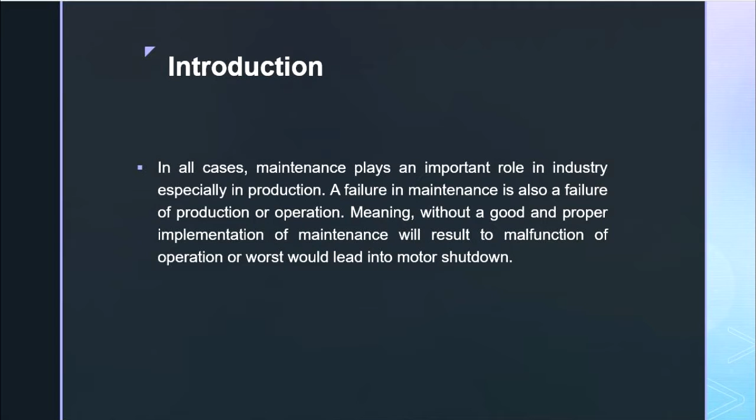Going on for introduction, in all cases, maintenance plays an important role in industry, especially in production. A failure in maintenance is also a failure of production or operation, meaning without a good and proper implementation of maintenance will result to a malfunction of operation or worst would lead into a motor shutdown. In modern plant operations, unscheduled stoppages of production or long repair shutdowns are intolerable. The high cost of the resultant downtime cuts deeply into profits. Among the 4 M's of production, which are the machine, method, manpower, and material, the highest contributing factor to downtime of the company is the machine.

Now, the company started its operation in 1999. Since then, the motors are repaired only if failure occurs. One of the major reasons is that it is too costly. As much as possible, the company wants lower expenses, thus they minimize their operation and maintenance cost. Considering the problems that we mentioned, the researchers decided to conduct an evaluation of the existing equipment at Kalaw Agro-Industrial Corporation, or KAIC Feed Mill.

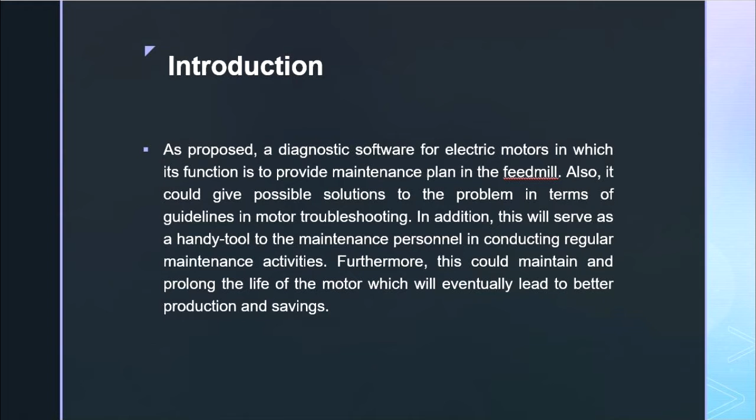The researchers proposed a diagnostic software for electric motors, in which its function is to provide a maintenance plan for the feed mill. Also, it could give possible solutions to the problems in terms of guidelines for motor troubleshooting. In addition to this, it will serve as a handy tool to the maintenance personnel conducting regular maintenance activities. Furthermore, this could maintain and prolong the life of the motors, which will eventually lead to better production and savings. Now, let's proceed to our objectives for our study.

First, the researcher will have to evaluate the profile of the electric motors in Kalaw Agro-Industrial Corporation feed mill in terms of its types of motors, specification of motors, date of its purchase, date of installation, and date of operation.

Second, the researcher will have to develop a diagnostic system software considering the following design: first is software design, which includes the database design as well as the algorithm. Next are those standards in compliance with organizations such as the IEC or International Electrotechnical Commission, the Philippine Electrical Code or PEC, and the National Electrical Manufacturers Association or NEMA.

Also, the researcher includes those factors that affect the condition of the motor. This includes the electrical factors, mechanical factors, as well as the environmental factors. And of course, for the effective maintenance program for the motors, the researcher provided a corrective maintenance such as motor troubleshooting, and for scheduled maintenance, which includes preventive maintenance and predictive maintenance.

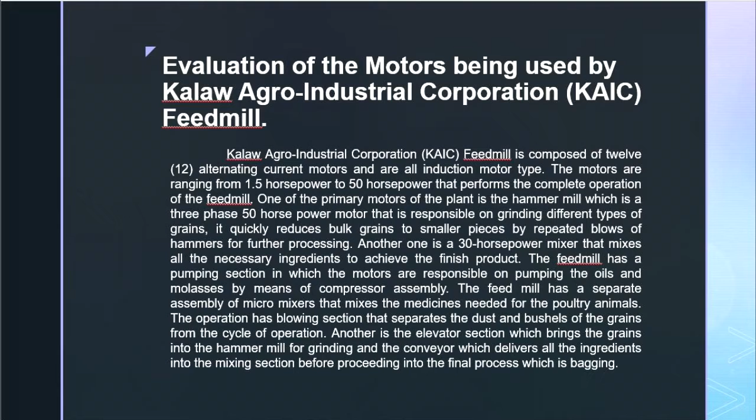The operation has a blowing section that separates dust and husks of the grains from the cycle of operation. Another is the elevator section, which brings the grains into the hammer mill for grinding, and the conveyor, which delivers all the ingredients into the mixing section before proceeding into the final process, which is bagging.

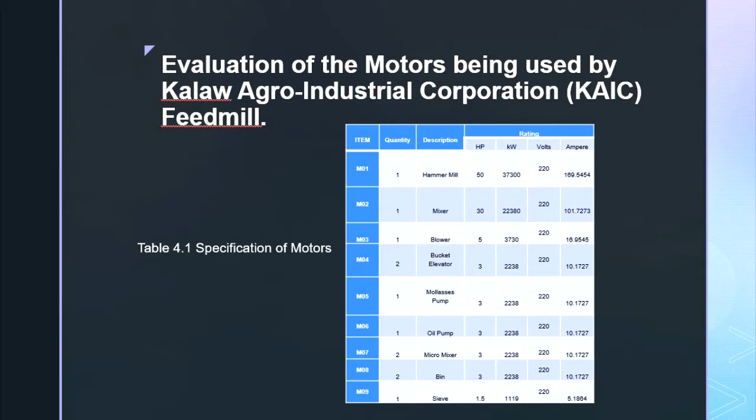The motors present in the feed mill are as follows: first is the hammer mill at 50 horsepower, next is the mixer at 30 horsepower, the blower at 5 horsepower, the bucket elevator, molasses pump, oil pump, micromixer, and bin at 3 horsepower, and the sieve at 1.5 horsepower. The ratings of each motor, such as its voltage and ampere, are used in the system for profiling purposes.

4.2 is about the software design and development. The designing and development of the diagnostic software for electric motors, considering its system requirements, shall be discussed in this section. For software requirements, first is the flowcharts.

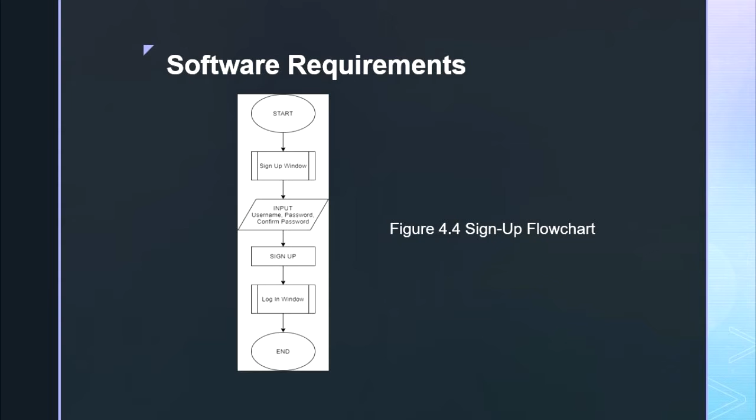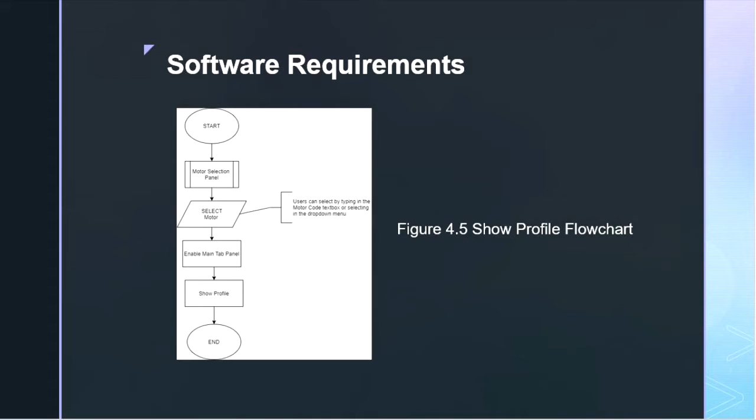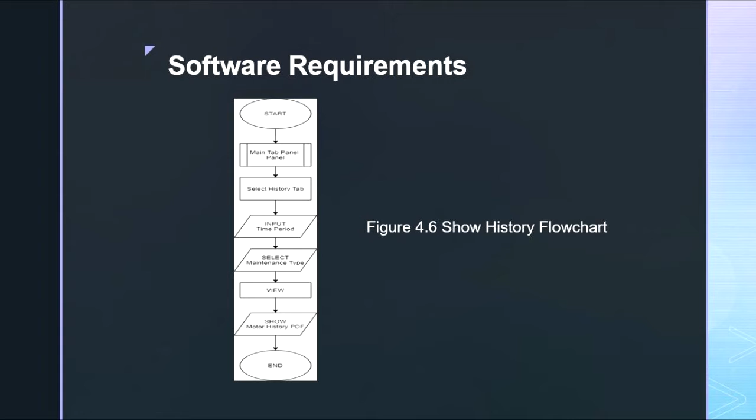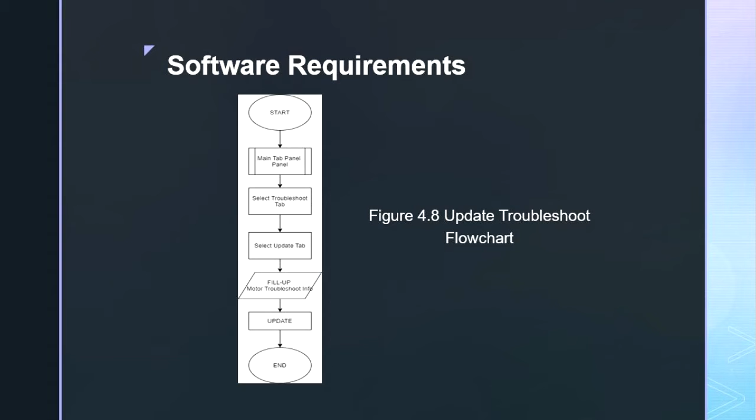Figure 4.10 is the Add Motor flowchart. Adding a motor is located on the motor selection panel. There is an Add Motor button where the user can click to register a motor. A motor registration window will be displayed where the user needs to fill up all the information about the motor. Once the information is complete, the user can add the motor by clicking the Add button.

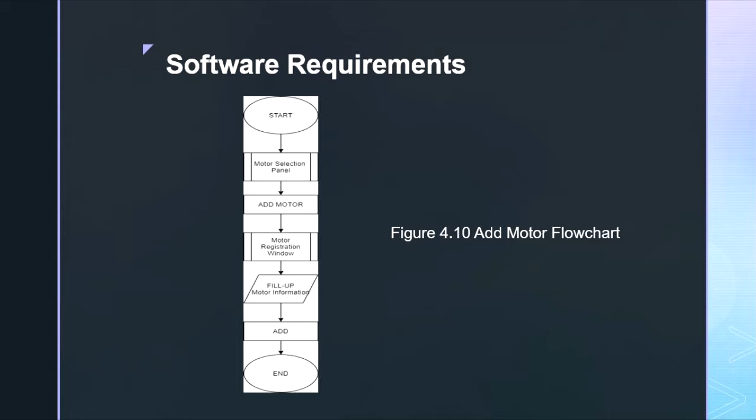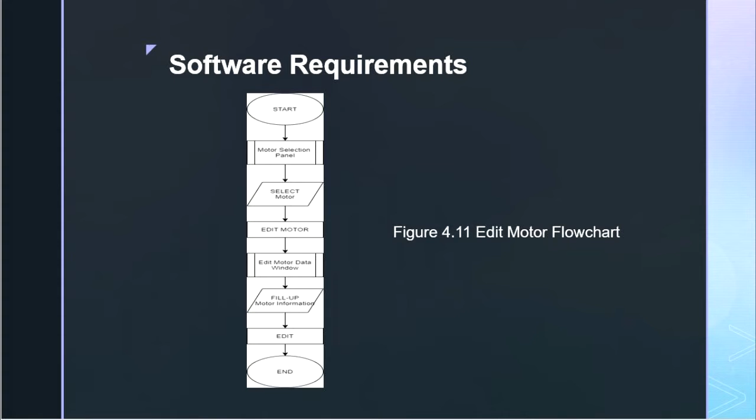Figure 4.11 is the Edit Motor flowchart. Editing the motor's information is also located on the motor selection panel. The user will select the motor to be edited, and the Edit button will be enabled. Clicking this button, an Edit Motor data window will display where the user can alter the information of the motor. After editing, the Edit button can be clicked to update into the system.

Figure 4.12 is the Delete Motor flowchart. In deleting a motor, the user will select a motor from the motor selection panel where the desired motor to be deleted will be chosen. After the motor has been selected, the user can access the Delete button, which when clicked will show a confirmation message asking if the user really wants to delete the motor. If yes, all the motor's information would be deleted.

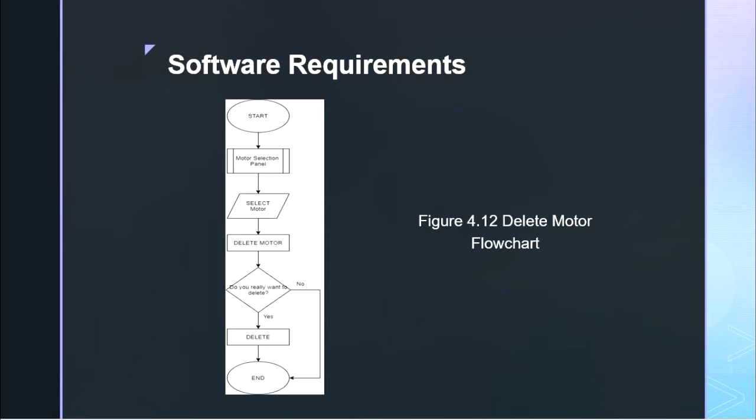Next is the programming language. The proponents used Visual Basic since this programming language has basic functions and commands that let the proponents simply drag and drop the objects and define its behavior and appearance.

Furthermore, there are methods that the proponents followed to establish a working system. First is the preparation of data: the manuals needed for the maintenance were gathered from other related studies and internet sources. Second is the software development: the software has different forms which were distributed within the proponents. The forms include the registration, profile, history, scheduled maintenance, the preventive and predictive, and the troubleshoot.

Third is the integration of data: the developed forms were integrated to establish a working system software. Lastly is the testing and simulation: the proponents underwent several testing and simulation of the software to identify the troubles and to finalize the functionality of the system. Next is the GUI, or Graphical User Interface design. The proponents designed the software as a user-friendly system.

The placement of the data was located where the user will have easy access, and the idea was comprised to minimize the space needed for a certain data.

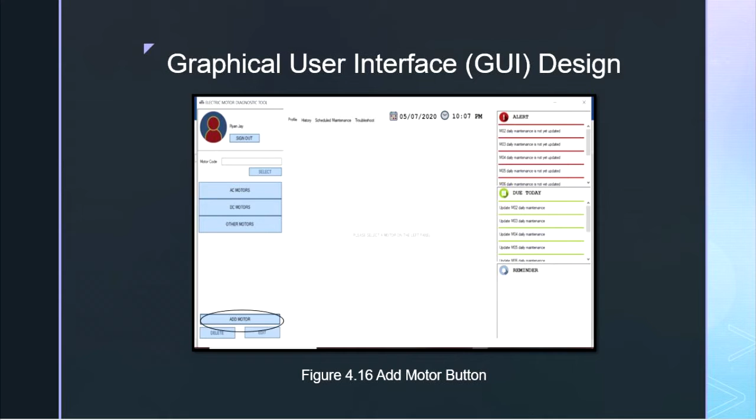Figure 4.16 shows the Add Motor button. Once the user was logged in, the system will allow you to select a motor if there is an existing one. But if there is not, you can add a motor into the system by clicking the Add Motor button on the lower left part of the window.

Figure 4.17 is the motor registration window. In the motor registration window, the user can now register a motor that was present in the company. The basic information like motor type, motor name, motor code, manufacturer, model, date of purchase, date of installation, and date of operation was needed to fill up, located on the left side of the window.

Another section to fill up on the right side is for the nameplate of the motor, basically its voltage, current, frequency, and phase. Next to it is the notification and alert settings, which enable the system to notify the personnel when the maintenance proper should be done. After filling up, the user can now add the motor into the system.

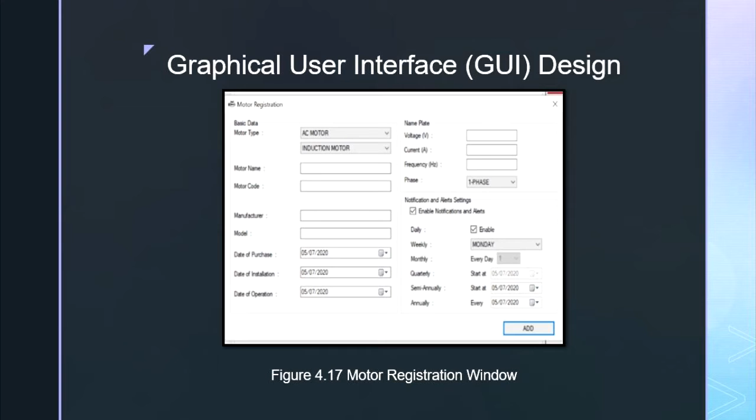The three buttons in figure 4.18 show the Add Motor, Edit, and Delete buttons. The Add Motor button allows the user to register motors into the system as illustrated in figure 4.17. The Edit button enables the user to alter the information that has been registered, while the Delete button allows the user to delete the information of a certain motor in the system.

Figure 4.19 is the motor selection panel. It shows the three classifications of electric motors, namely AC motors, DC motors, and other motors. In this panel, a motor code text box and select button are also located. The user may type the code of the motor for easier access, and when the motor code has been typed, clicking the select button will display its profile and maintenance modules.

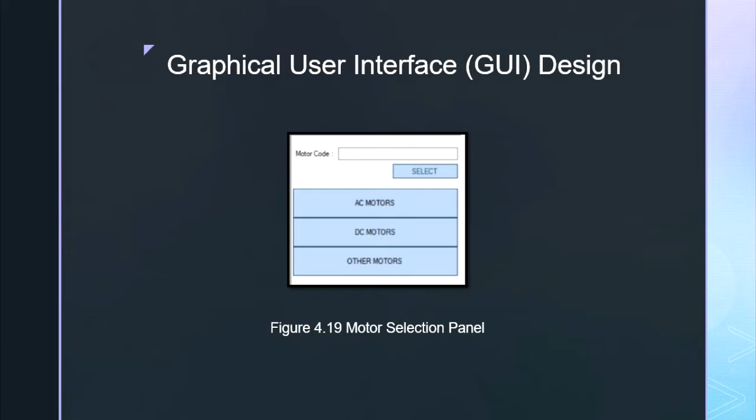The user may select the motor needed to be maintained by clicking the type of motor located on the motor selection panel on the left side of the window.

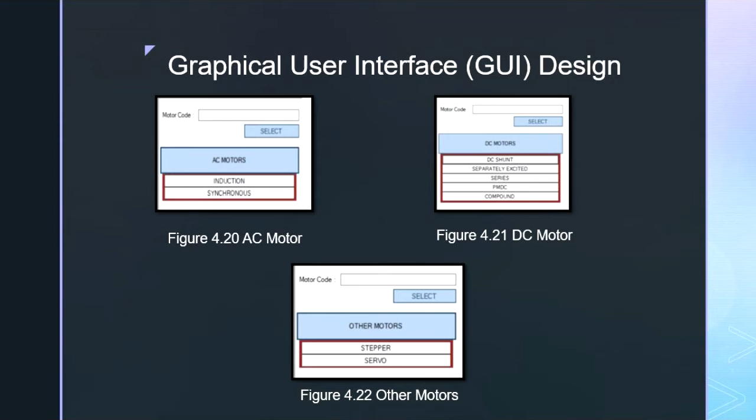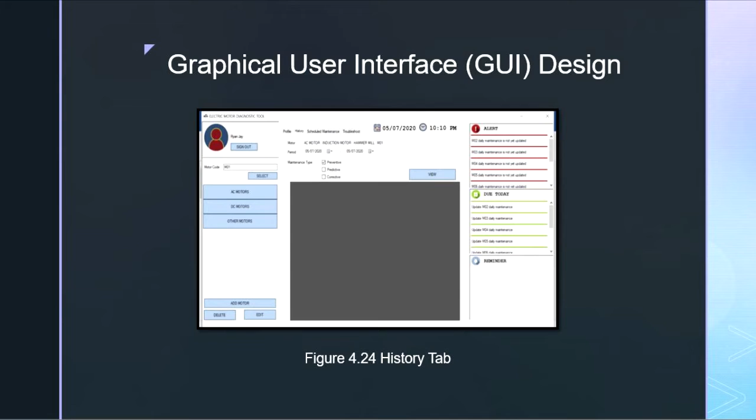Figure 4.24 shows the History tab. For the History tab, the user may select the period of the date where the history of all maintenance was done. The checkbox beside each maintenance type pertains to what type of maintenance the user wants to view.

Figure 4.25 shows the history records. Once the user clicks view, a PDF file will flash into the selected area allotted for viewing the maintenance history of motors. This file was intended to be a PDF file for the user to be able to print it out. In this record, the personnel who did the maintenance and the date when the maintenance was done were included.

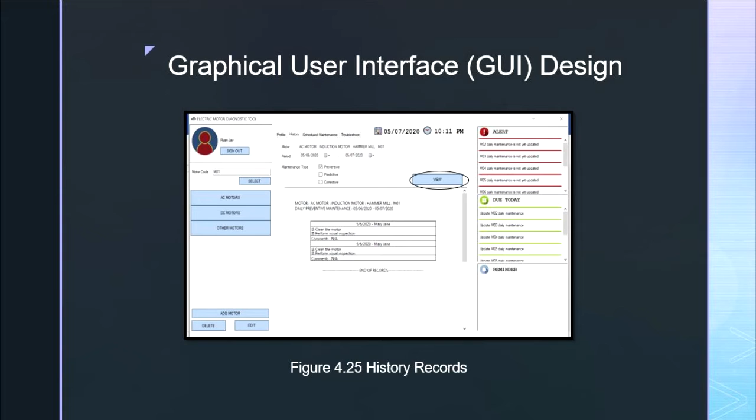Figure 4.26 shows the Scheduled Maintenance tab pertaining to preventive maintenance. Next to the History tab was the Scheduled Maintenance tab. This tab also has a sub-tab under it, which is the classification of the scheduled maintenance, namely Preventive and Predictive Maintenance. In the Preventive Maintenance tab, the user will see all the scheduled maintenance on the selected motor: the daily, weekly, monthly, semi-annual, and annual schedule of maintenance.

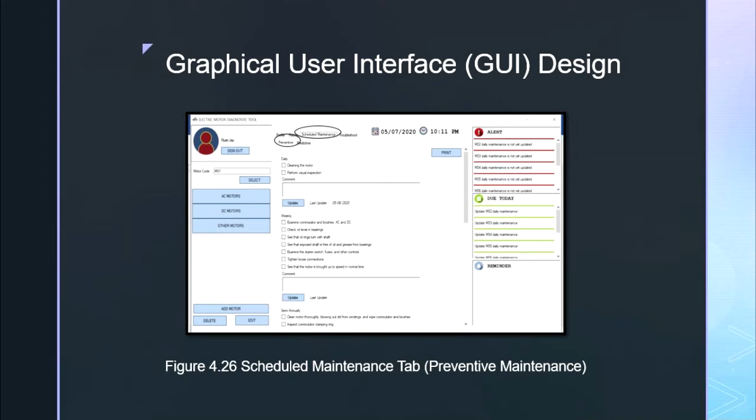In this tab, the user may also print out the manual as a guide of what he will need to do for that specific motor. After doing so, the system will be updated by checking the corresponding action that the user did on the motor for recording purposes. Figure 4.27 also shows the Scheduled Maintenance tab which pertains to the Predictive Maintenance.

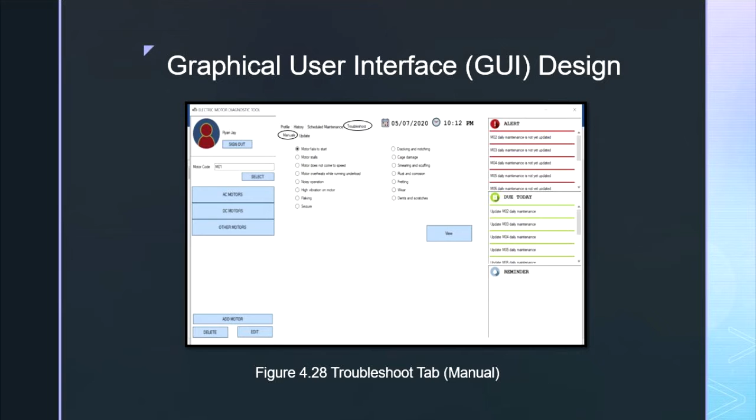Figure 4.28 shows the Troubleshoot tab pertaining to the Manual tab. For the Troubleshoot tab, a Manual tab and an Update tab were located. For the Manual tab, the user may see all the types of troubles that may happen in the selected motor.

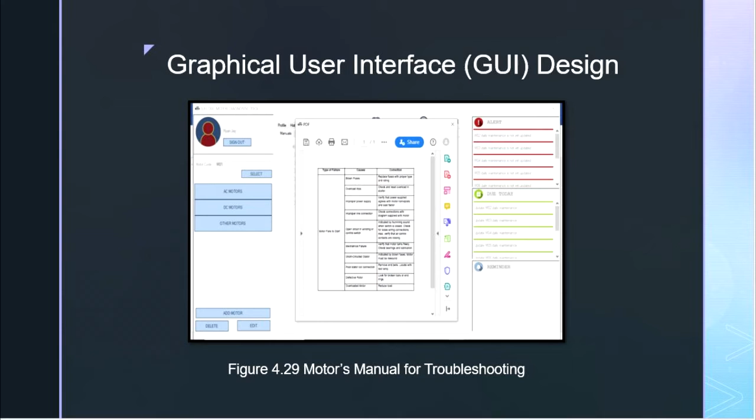In Figure 4.29, it shows the motor's manual for troubleshooting. Once the user clicks the View button for the selected trouble, the system will display the PDF file of the manual for that particular trouble. This manual could be printed out as a guide for the personnel before doing the troubleshoot.

Figure 4.30 shows the Troubleshoot tab pertaining to the Update tab. Next to the Manual tab is the Update tab. This Update tab is only intended for the updates of the troubles in a certain motor.

Once the user was done troubleshooting, he must update the system with the following information: type of failure, cause, date of failure, and date fixed. A respective comment box was created for the corrective action done by the personnel to be filled up. Completing all the information allows the user to update the system.

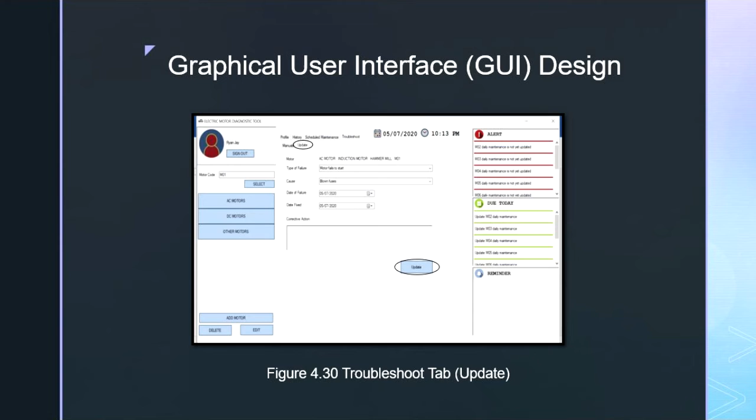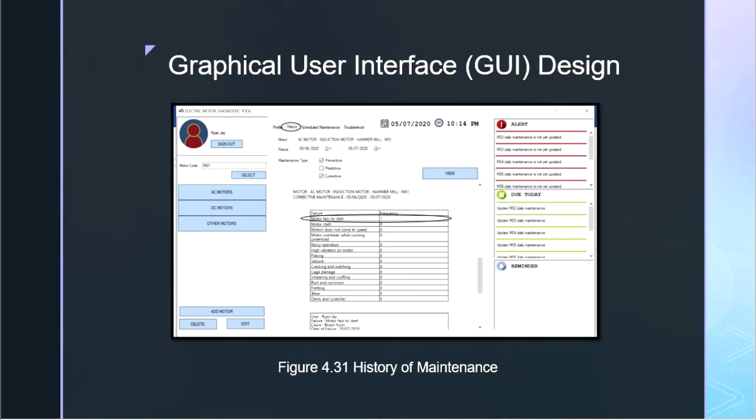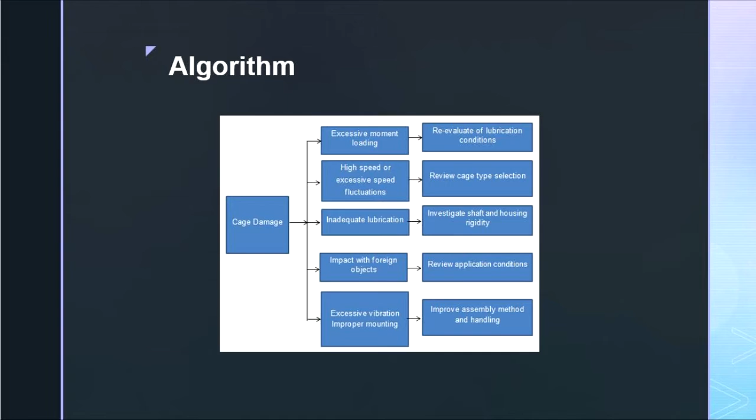The algorithm used in the development of the diagnostic software is decision tree. Using this algorithm, if the motor subjected to the maintenance program of the diagnostic tool experiences malfunctions, the software identifies the possible causes of failure. Once the failure is identified, it will be followed by its corresponding action plan that serves as a solution to the problem or failure being encountered.

Next is the software testing. This section discusses the testing of the software application. Due to the coronavirus pandemic, the testing will only include the functionality test since the performance testing could not be done by the proponents on the beneficiary because of the declared Enhanced Community Quarantine or ECQ.

Functionality testing is the testing that verifies that each function of the software application operates smoothly. First is the AC motor maintenance test. In this test, the functionality of the system's notification and update in AC motor maintenance will be tested.

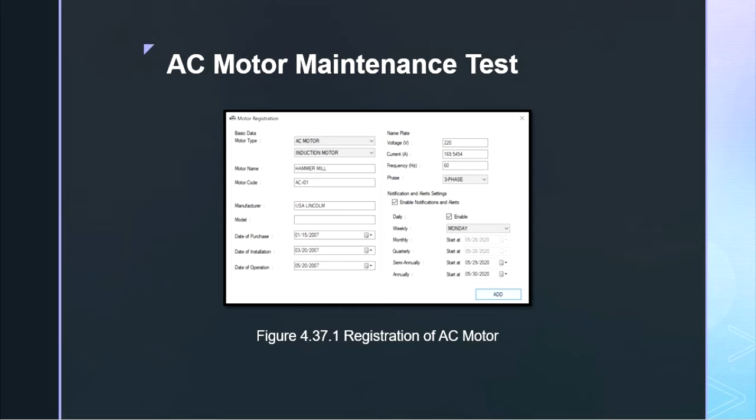Figure 4.37.1 shows the registration of the AC motor into the system. All the information such as basic data, nameplate, and notifications and alerts are all filled up. The notifications for AC motor maintenance were discussed in the following. First is the daily.

The user can enable or disable this notification since it was scheduled daily, meaning this maintenance should be done every day. Next is weekly. The user may select from Monday up to Sunday when the maintenance must be done.

Third is semi-annually. The user will select when the semi-annual maintenance will be started in order for the system to set the date, depending on what the user wants to schedule the maintenance.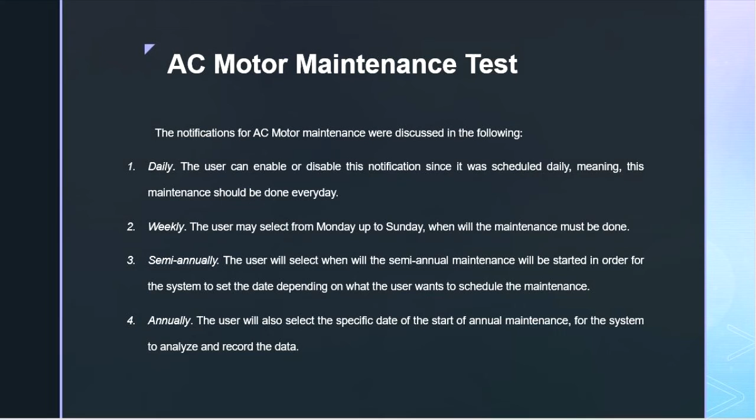Last is annually. The user will also select the specific date of the start of annual maintenance for the system to analyze and record the data. After filling up, the Add button must be selected for the input motor to be recorded on the system.

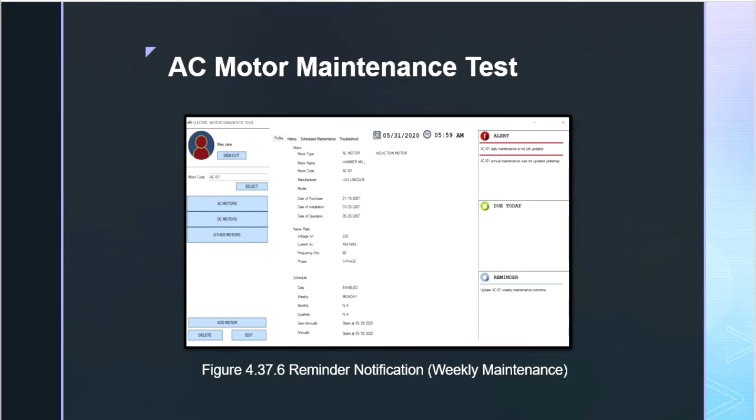Figure 4.37.6 is the reminder notification for the weekly maintenance. Setting the date on Sunday, the day before the scheduled maintenance, a notification appears at the reminder panel. This reminder panel helps the user to notify that there is a scheduled maintenance needed to be done on the following day.

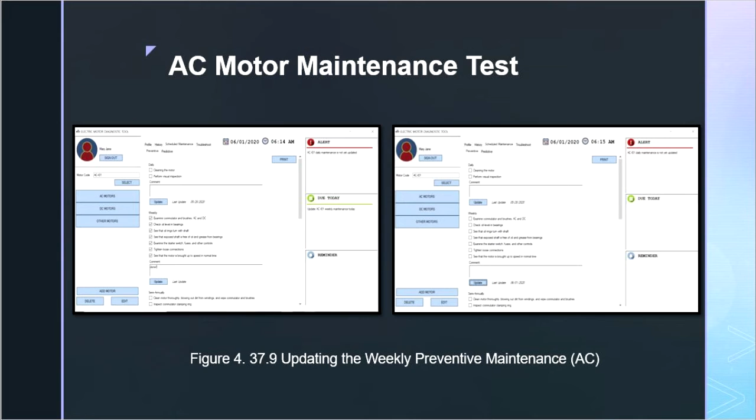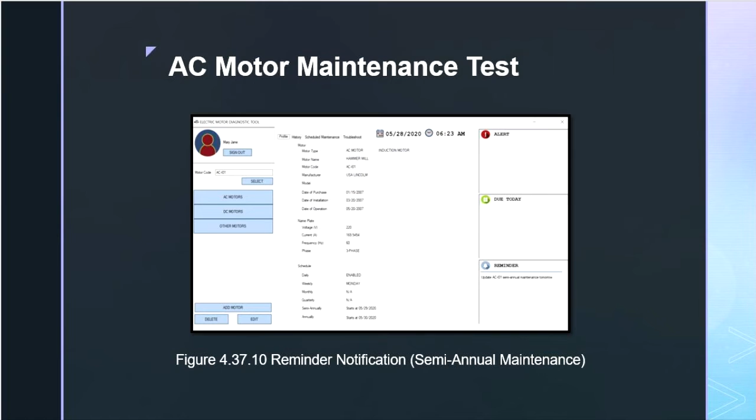Figure 4.37.10 is the reminder notification for the semi-annual maintenance. For the scheduled semi-annual preventive maintenance, the user may see the scheduled date at the Profile tab. Manipulating the date of the computer, which is set to the day before the scheduled maintenance, a reminder notification appears for the semi-annual maintenance.

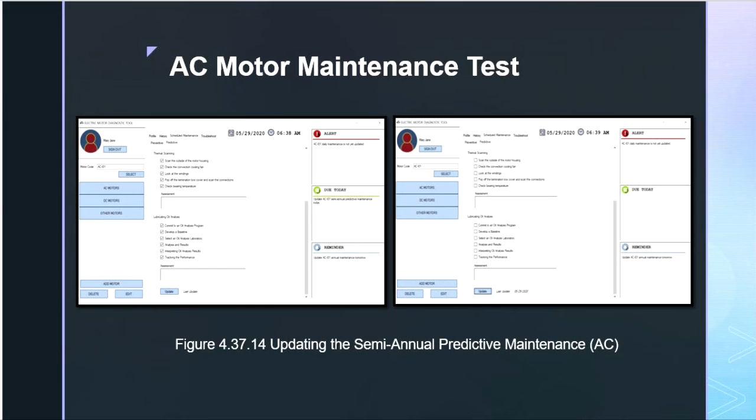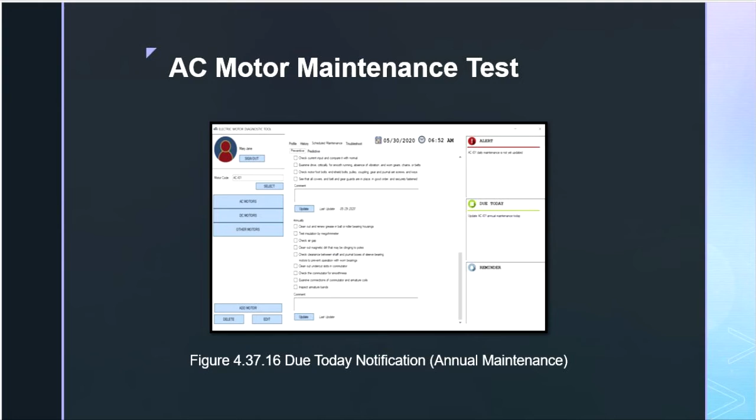Figure 4.37.16 is the due today notification for annual maintenance. When the user set the date on the scheduled day, the due today notification for annual maintenance appears.

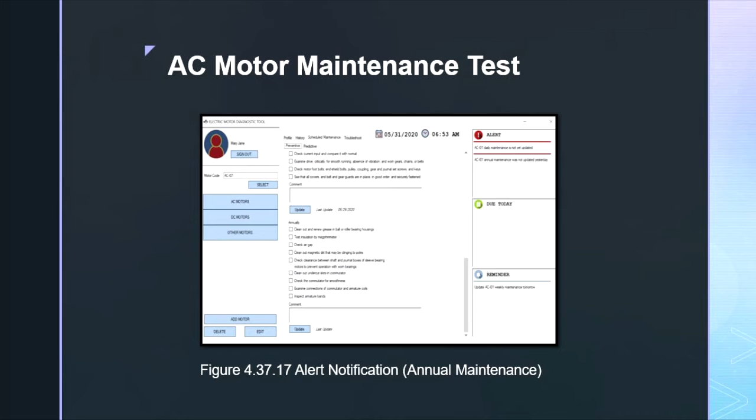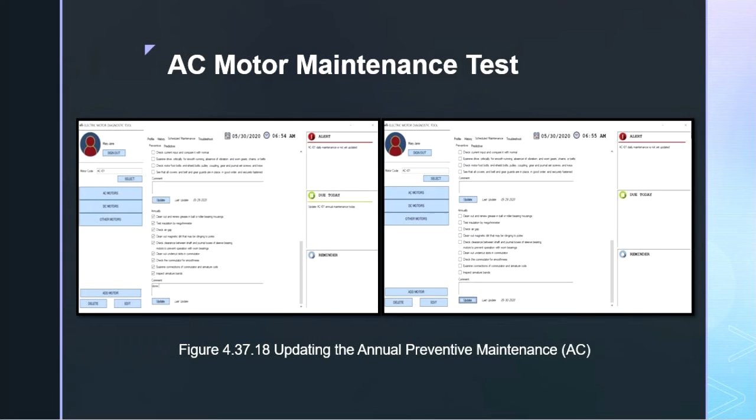Figure 4.37.20 is the troubleshoot update for AC motor. For the troubleshooting of AC motor, the user clicks the troubleshoot tab and then the update tab. The user fills up all the information done on the troubleshoot and updates the system.

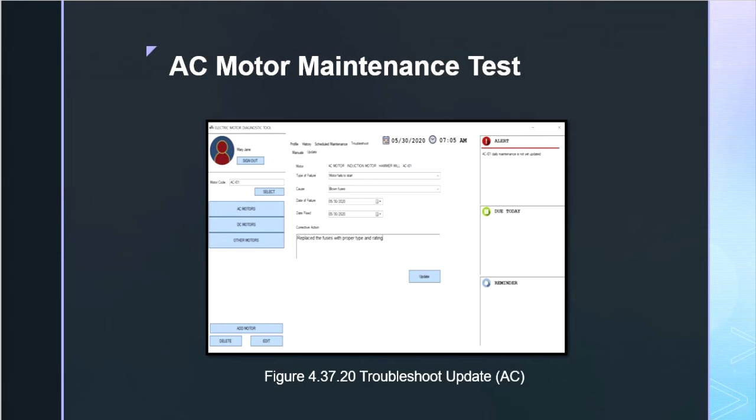Figure 4.37.21 is showing the history of all the maintenance. In showing the history of all the maintenance done, the user clicked on the History tab. Setting the period of the maintenance done and checking the corresponding maintenance that the user wants to see, the View button will show all the maintenance. Those recorded maintenance come with the date and the personnel who did the maintenance. Also, each page of the history has its title block which distinguishes the maintenance according to the type of maintenance, type of motor, and the period.

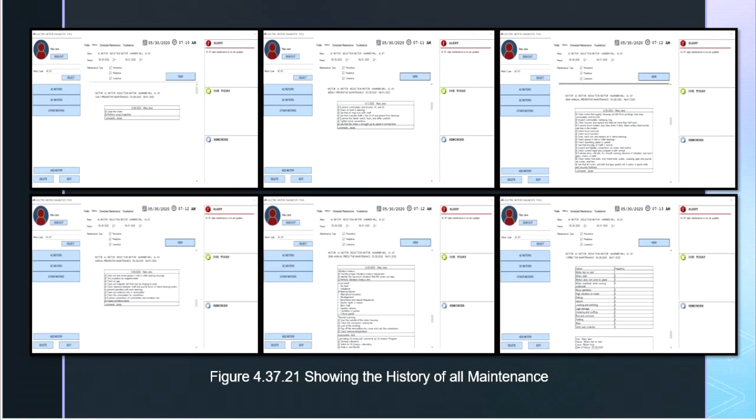Second test is the DC motor maintenance test. In this test, the functionality of the system's notification and update in DC motor maintenance will be tested.

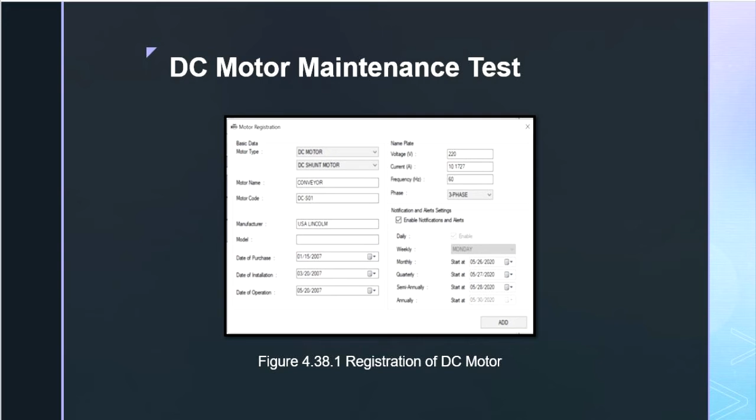Figure 4.38.1 shows the registration of the DC motor into the system. All the information such as basic data, nameplate, and notifications and alerts are all filled up. The notifications for DC motor maintenance were discussed in the following.

First is the monthly. The user will set the date when the monthly maintenance will start. With this setup, the system will be able to register the data which will be followed for the next dates of maintenance.

Second is the quarterly. The user may also select a specific date of the start of quarterly maintenance. The system was intended to display the notifications every after 3 months.

Last is semi-annually. The user will select when the semi-annual maintenance will be started in order for the system to set the date depending on what the user wants to schedule the maintenance. After filling up, the Add button must be selected for the input motor to be recorded on the system.

Figure 4.38.2 is the selecting of the DC type of motor. The user selected the DC motor on the motor selection panel, which was registered in Figure 4.38.1.

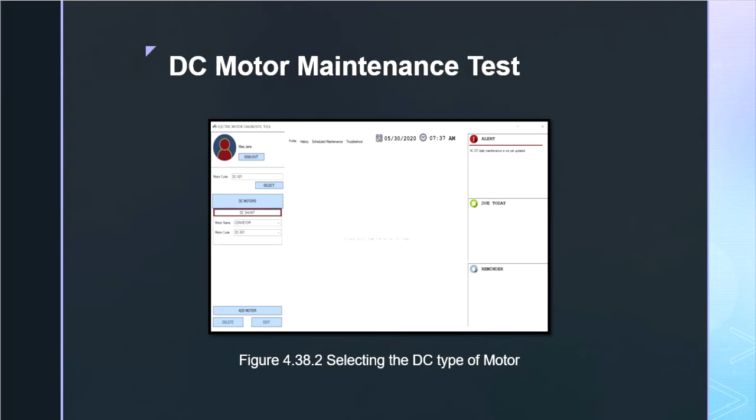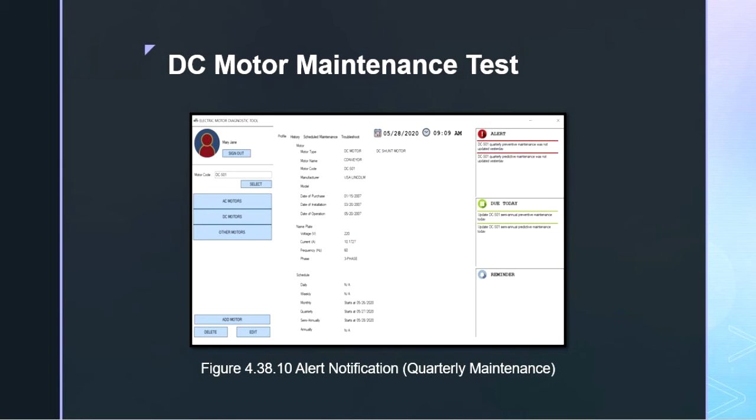Figure 4.38.12 is the updating of the quarterly preventive maintenance for DC motor. Same action was done on the preventive maintenance, where the user checked the checkbox and updated the system. The due today notification for quarterly preventive maintenance also vanished.

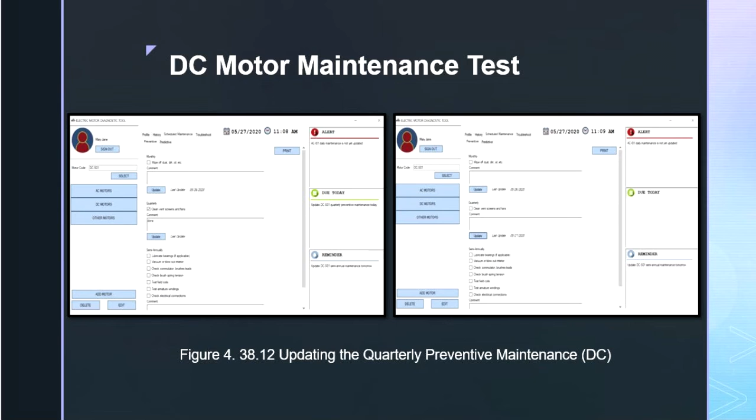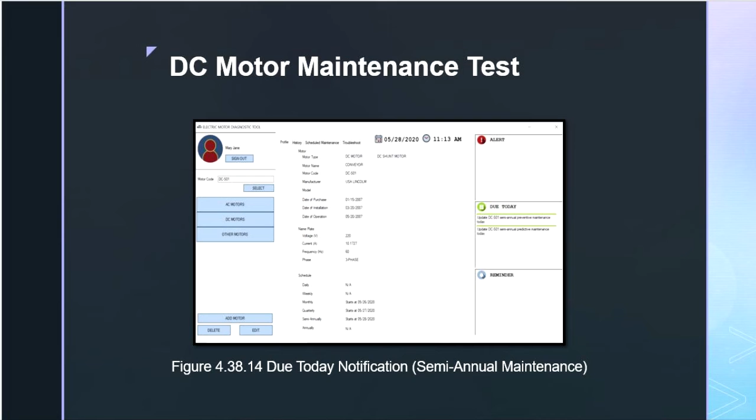Figure 4.38.16 is the updating of the semi-annual preventive maintenance of DC motor. In updating the semi-annual preventive maintenance, the user checked the checkbox of the corresponding maintenance that was done. When the update button was clicked, the due today notification for semi-annual preventive maintenance vanished. Also, the last update beside the update button has a corresponding date of action done.

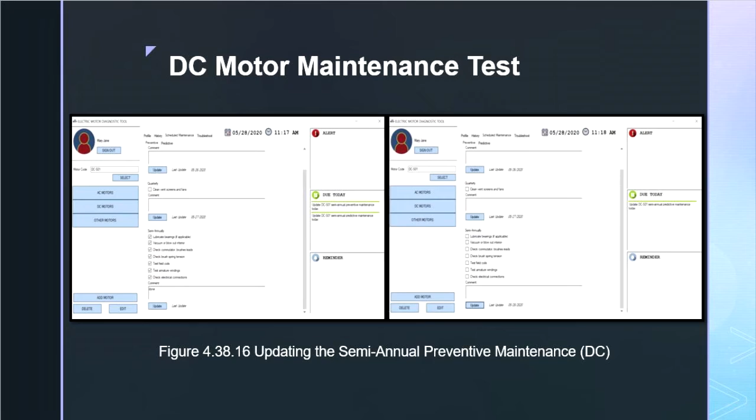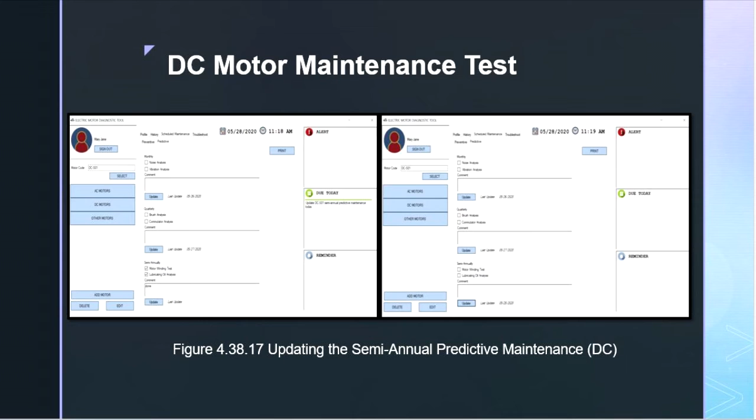Figure 4.38.17 is the updating of the semi-annual predictive maintenance. Same action was done in the predictive maintenance where the user checked the checkbox and updated the system. The due today notification for semi-annual predictive maintenance also vanished.

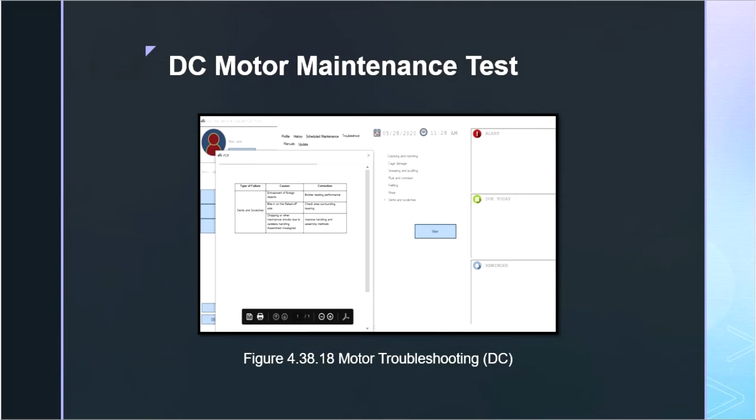Figure 4.38.18 is the motor troubleshooting for the DC motor. In motor troubleshooting, the user can browse and print the provided manual located on the Manual tab as a guideline for doing the troubleshoot. Figure 4.38.19 is the troubleshoot update for the DC motor.

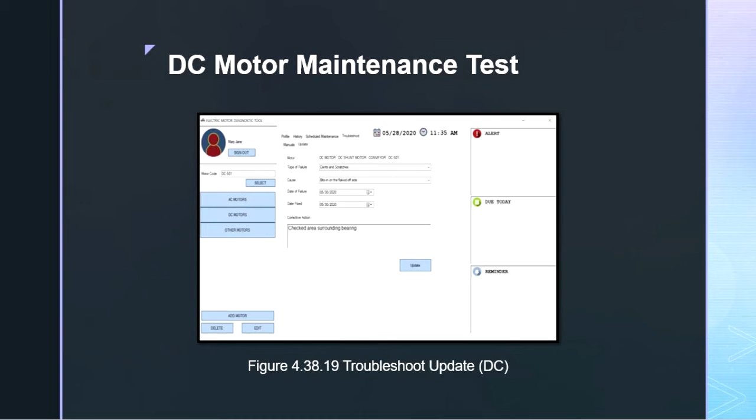For updating the troubleshoot, the user clicks the Update tab. The user fills up all the information done on the troubleshoot and updates the system. Figure 4.38.20 is the showing of the history of all the maintenance.

In showing the history of all the maintenance done, the user clicked on the History tab. Setting the period of the maintenance done and checking the corresponding maintenance that the user wants to see, the View button will show all the maintenance. Those recorded maintenance comes with the date and the personnel who did the maintenance.

Also, each page of the history has its title block which distinguishes the maintenance according to the type of maintenance, type of motor, and the period. The history could also be printed.

Moreover, in the history of the troubleshooting, there is a frequency, as can be seen in figure 4.38.20. This frequency pertains to how many times the trouble occurred and with what particular failure.

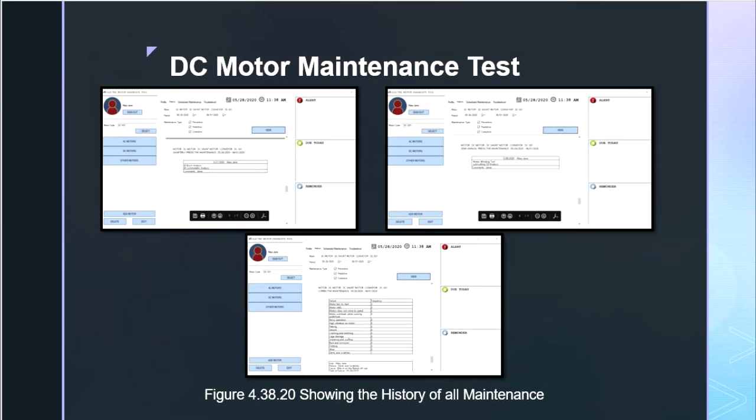Lastly is the other motor maintenance test. In this test, the functionality of system notification and update in other motor maintenance will be tested.

Figure 4.39.1 shows the registration of the servo motor into the system, which was located on the other motors. All the information such as basic data, nameplate, and notifications and alerts are all filled up. The notifications for other motor maintenance were discussed in the following.

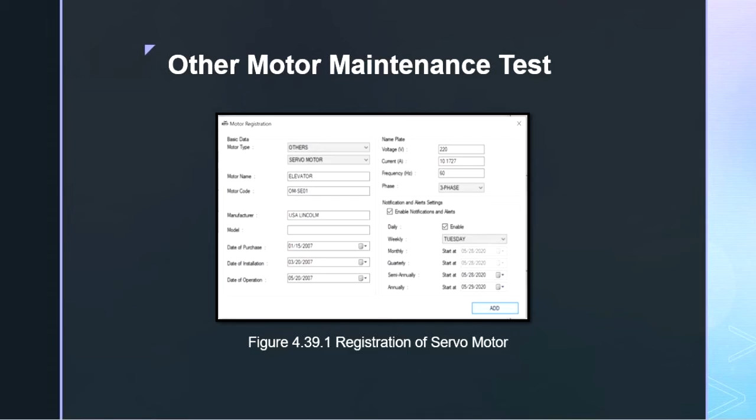First, the daily. The user can enable or disable this notification since it was scheduled daily, meaning this maintenance should be done every day. Second is the weekly.

The user may select from Monday up to Sunday when the maintenance must be done.

Third is the semi-annually. The user will select when the semi-annual maintenance will be started in order for the system to set the date depending on what the user wants to schedule the maintenance.

Last is the annually. The user will also select the specific date of the start of annual maintenance for the system to analyze and record the data.

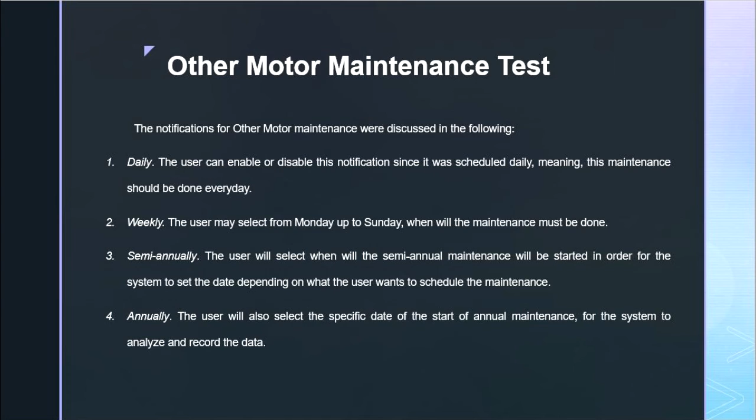After filling up, the Add button must be selected for the input motor to be recorded on the system.

Figure 4.39.2 is the selecting of the servo type of motor. The user selected the other motor on the motor selection panel and chose the servo motor, which was registered in Figure 4.39.1. Figure 4.39.3 is the alert notification for the daily preventive maintenance.

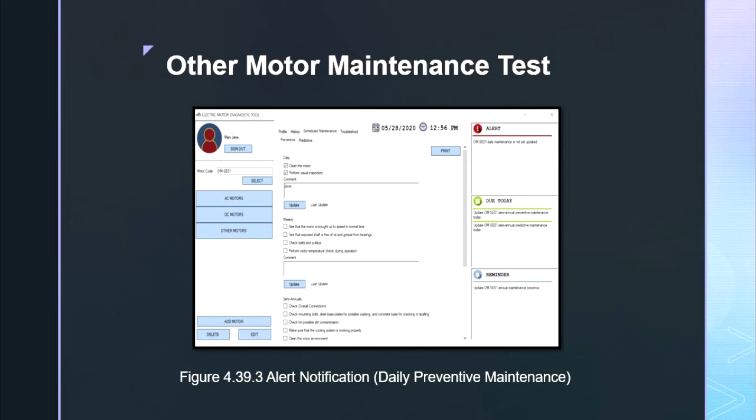Upon selecting the type of motor, there is an alert notification found in the alert panel for the daily maintenance of the other motor. This notification will vanish if the user has done the maintenance and updated the system. In this figure, the user checked the checkbox for updating.

Figure 4.39.4 is the updating of the daily preventive maintenance for servo motor. By clicking the update button, there is a confirmation message asking if the user wants to update the maintenance.

Waiting a few seconds, the daily maintenance notification on the alert panel was gone. Also, beside the update button under preventive maintenance, the last update date was recorded.

Figure 4.39.5 is the weekly preventive maintenance schedule for the servo motor. The figure shows when the user scheduled the weekly maintenance. This could be seen under the Profile tab. Since the user scheduled it on Tuesday, the user will manipulate the date of the computer used to identify whether the weekly maintenance will appear on the notification or not.

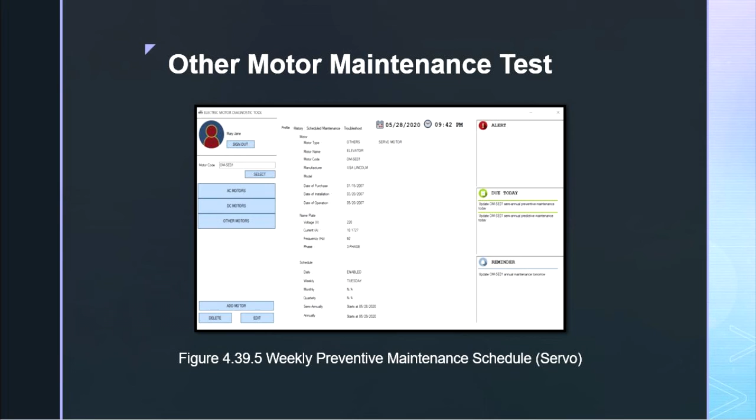Figure 4.39.6 is the reminder notification for weekly maintenance. A notification appears at the reminder panel. This reminder panel helps the user know that there is a scheduled maintenance needed to be done on the following day.

Figure 4.39.7 is the due today notification for the weekly maintenance. Changing the date of the computer to the date of the scheduled weekly maintenance, the Tuesday, the notification appears at the due today panel. The due today panel notification will vanish if the user has done updating this maintenance.

Figure 4.39.8 is the alert notification for the weekly maintenance. If the user forgot to do the maintenance, the notification will appear on the alert panel. This alert notification will also vanish if the user updates the maintenance of the motor on that day.

On the other hand, if the user updated the scheduled weekly maintenance on the scheduled date, the notification will no longer appear on the alert panel on the next day.

Figure 4.39.9 is the updating of the weekly preventive maintenance for servo motor. In updating the weekly preventive maintenance, the user checked the checkbox of the corresponding maintenance that was done.

When the update button was clicked, after a few seconds, the due today notification for weekly maintenance vanished. Also, the last update label beside the update button has a corresponding date of action done.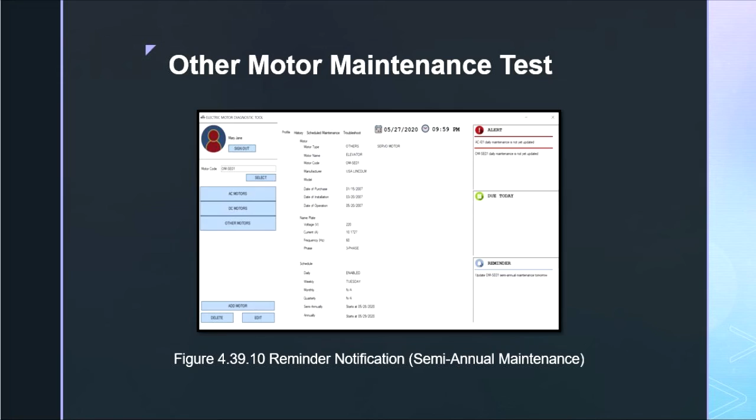Figure 4.39.10 is the reminder notification for semi-annual maintenance. For the scheduled semi-annual preventive maintenance, the user may see the scheduled date at the Profile tab. Manipulating the date of the computer, which is set to the day before the scheduled maintenance, a reminder notification appears for the semi-annual maintenance.

Figure 4.39.11 is the due today notification for semi-annual maintenance. Setting the date at the day of the scheduled semi-annual maintenance, the notification will appear at the due today panel. In the due today panel, two scheduled maintenances, preventive and predictive, are seen.

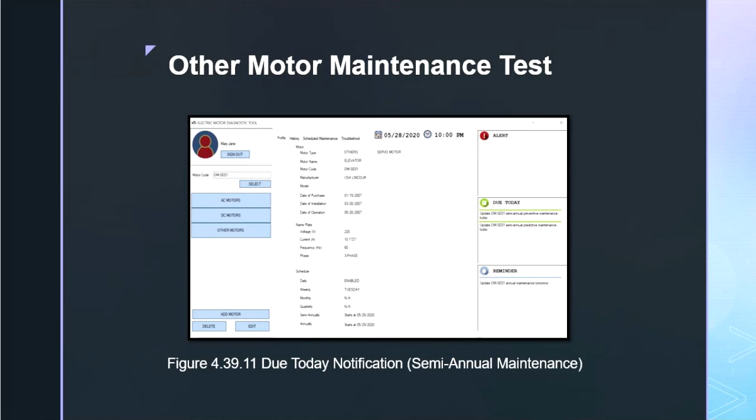This is because the scheduled maintenance on the other motor for predictive has the same schedule as the preventive. The notifications were doubled because if the user forgot to do the predictive maintenance on that day, it will still appear on the alert notification.

Figure 4.39.13 is the updating of the semi-annual preventive maintenance for servo motor. The user checked the checkbox of the corresponding maintenance that was done. When the update button was clicked, the due today notification for semi-annual preventive maintenance vanished. Also, the last update beside the update button has a corresponding date of action done.

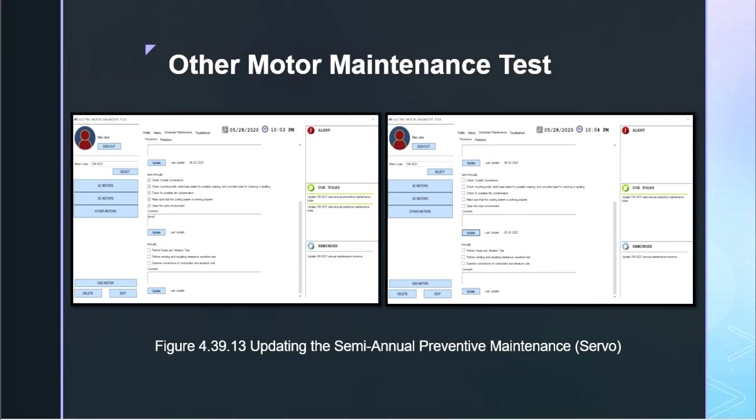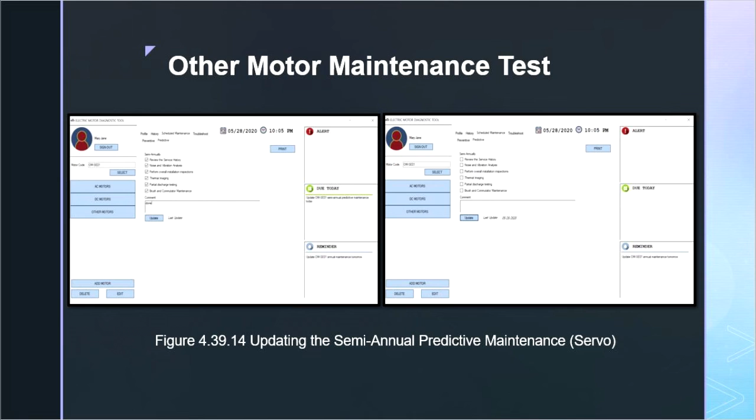Figure 4.39.14 is the updating of the semi-annual predictive maintenance for servo motor. The same action was done where the user checked the checkbox and updated the system. The due today notification for semi-annual predictive maintenance also vanished.

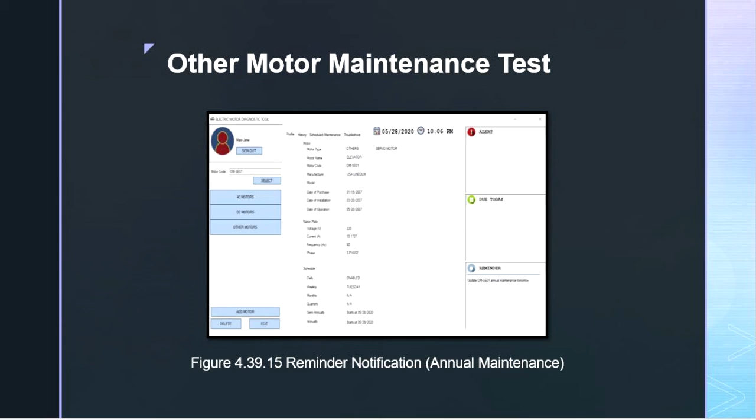Figure 4.39.15 is the reminder notification for the annual maintenance. As the computer used was set to the date before the scheduled annual maintenance, the reminder notification appears on the reminder panel.

Figure 4.39.17 is the alert notification for the annual maintenance. If the user wasn't able to do the maintenance on the scheduled day, setting the date of the computer on the next day, the notification for annual maintenance appears at the alert panel.

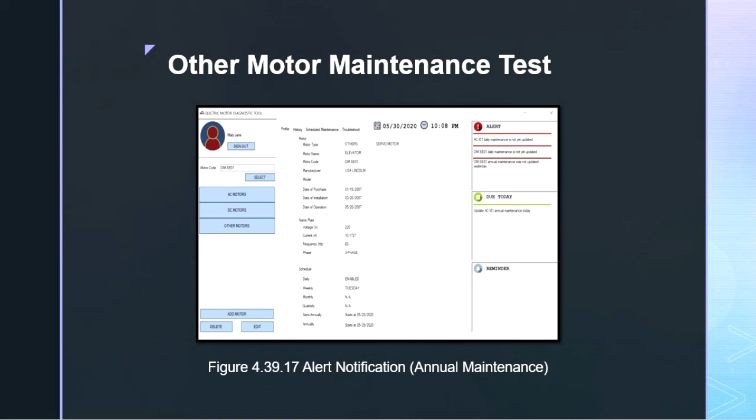Figure 4.39.18 is the updating of the annual preventive maintenance for servo motor. When the user updated the scheduled annual preventive maintenance on the scheduled date, the due today notification vanished.

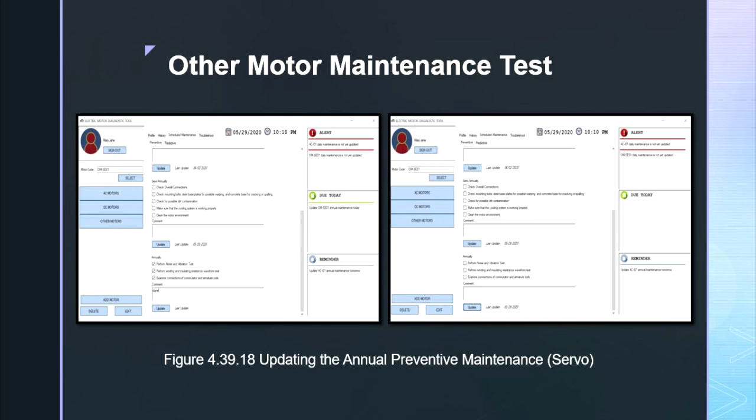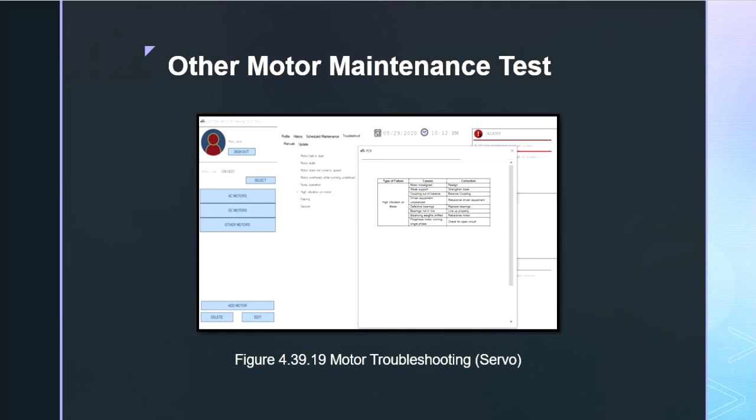Figure 4.39.20 is the troubleshoot update for the servo motor. For the troubleshooting of servo motor, the user clicks the troubleshoot tab and the update tab. The user fills up all the information done on the troubleshoot and updates the system.

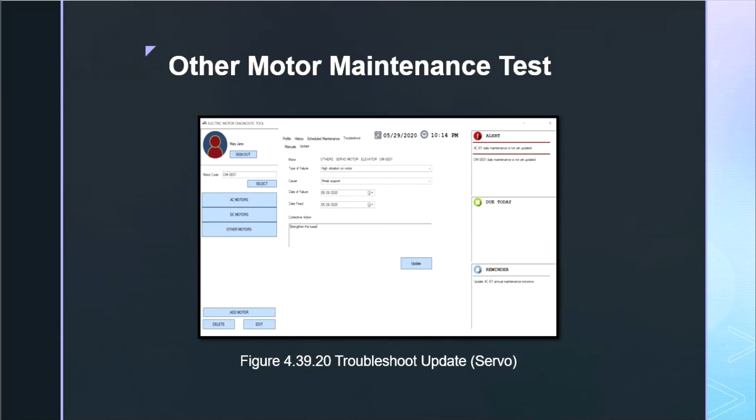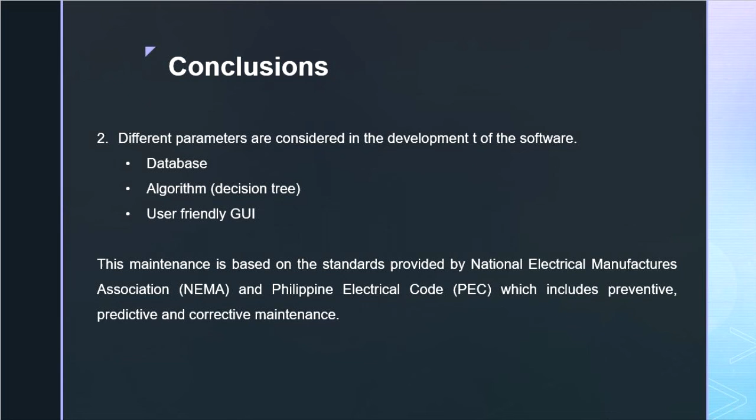The software provides maintenance based on the standards provided by the National Electrical Manufacturers Association, or NEMA, and the Philippine Electrical Code, or PEC, which includes preventive, predictive, and corrective maintenance.

The last part of the conclusion is about the testing of the diagnostic tool. All the features of the diagnostic software are working in accordance with its expected functions.

The diagnostic tool can successfully provide a maintenance program for the motor, such as scheduled maintenance and troubleshooting in case of failure, for both AC motors and DC motors, as well as other types of motors.

For the preventive and predictive maintenance, the software is capable of providing all the scheduled maintenance, which is the daily, weekly, monthly, quarterly, semi-annual, and annual maintenance.

When the electric motor experiences error or failure during operation, the diagnostic software also provides corrective action and will troubleshoot the motor to identify the possible cause as well as the possible solution to the trouble.

All the maintenance performed on the motor is kept in the diagnostic tool's history and can be used again for future maintenance plans. All records will be safe and can only be accessed by the authorized user. The maintenance plan of the software can be produced as a printout copy to serve as guidelines while performing maintenance on the motors.

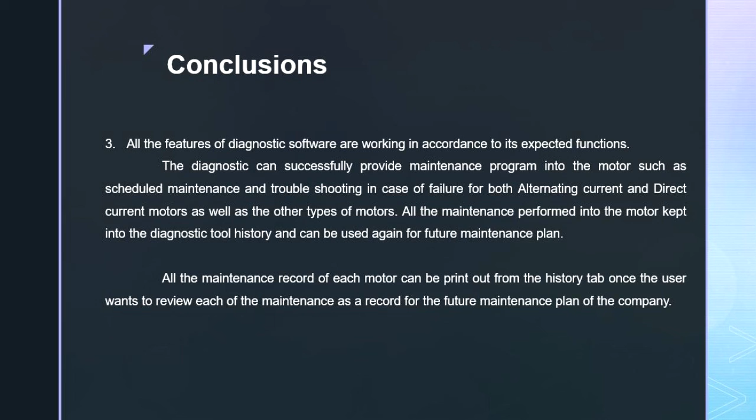All the maintenance records of each motor can be printed out from the History tab once the user wants to review each maintenance record for the preparation of the future maintenance plan of the company. The maintenance program embedded into the diagnostic tool is expected to improve the overall performance of the motor due to the preventive and predictive maintenance provided by the system.

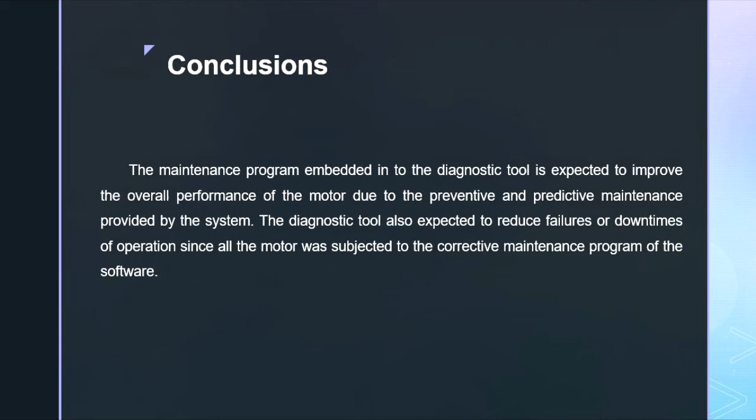For the possible future improvement of the research study, the researchers provide some recommendations. First, the researchers greatly recommend that future researchers continue the study for validation by testing it in a company, especially companies operating with motors that need such a motor maintenance program.

This is because the researchers were not able to do actual testing due to the pandemic experienced across the globe. Next, the researchers recommend that future researchers add more features into the diagnostic software for better maintenance of electric motors, such as motor sensors and other devices that will easily identify the failures of the electric motors.

The researchers recommend that future researchers work collaboratively with programming-related researchers since they are more knowledgeable in the field of programming. The diagnostic software should be bound to the internet so that the user can access the information of the software in case of emergency access.

Lastly, the testing of the software should be done in a company that has a complete classification of motors, from AC to DC and other types of motors. In that way, the researchers can identify the functionality, efficiency, and reliability of the diagnostic software.

This ends chapter 5 of our project study.